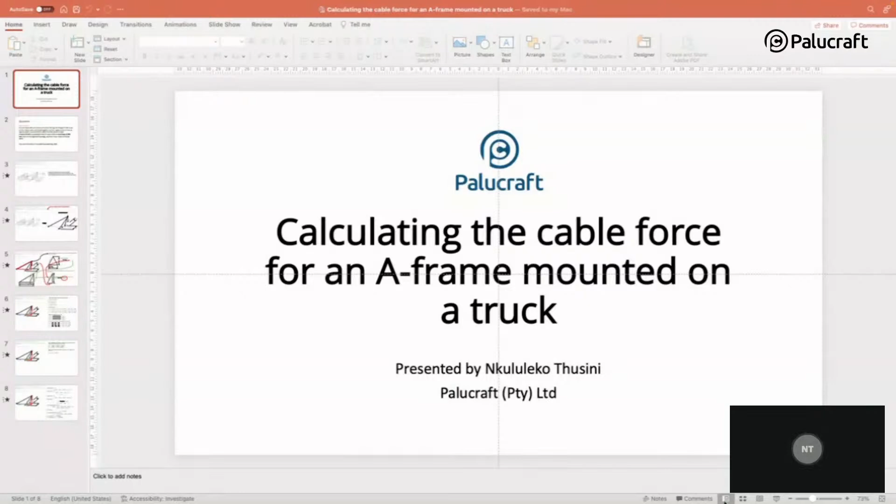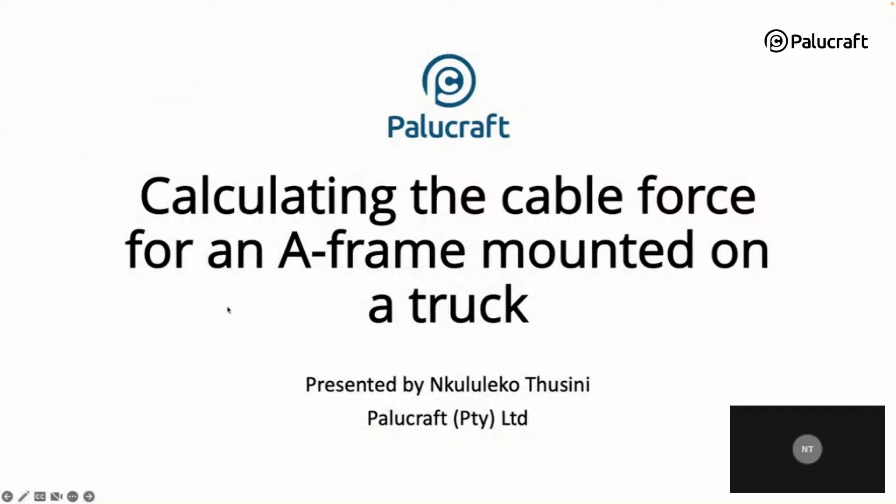So this problem, that truck A-frame question, coming from it was the first that we've seen. It was in the November 2006 exam, and it was also asked in the June 2017 and recently in the June 2022 exam. So last year we did an improved solution to this.

Some of the other solutions that we've seen just didn't make sense, and it was not very methodological, right? So I'm hoping that after today you'll be able to solve this type of question and any other variation in the future. So the question goes as follows.

So you've got a truck which is fitted with an A-frame, of which the legs are hinged to the truck at their lower ends and joined together at their upper ends to form an apex, to which one end of the cable from the winch is fixed.

So a load of 4,000 newtons is suspended from the apex with an overhang of 800 millimeters. Each of the legs is 2.5 meters long, and their lower ends are 1.5 meters apart. You're required to calculate the force in the cable and the force in each of the legs, and this is for 12 marks.

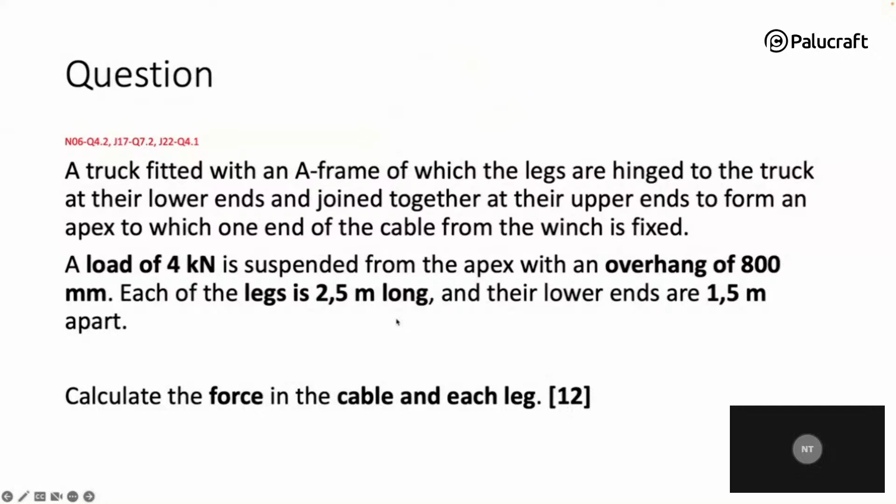So the first thing you need to note about this problem is that in the June 2022 and the June 2017 exams, they didn't include the schematic here, which was included in the November 2006 exam. What I can tell you is that it's almost impossible to solve this problem without the schematic, or at the very least being given that cable angle there of 30 degrees.

So in the June 2022 exam and the June 2017, they didn't include it, and we did inform the Department of Labour that the question itself is problematic and it doesn't allow candidates to actually answer the question.

So you're probably asking yourself, then what do I do when I come to the exam and they don't include that? So you don't give up, you make a reasonable assumption. So the reasonable assumption that you will make here is that angle is 30 degrees, or whatever reasonable assumption that you can make.

Or if let's say you've never seen this question, then you just need to assume the angle, that cable angle over there, in order for you to be able to actually answer this question.

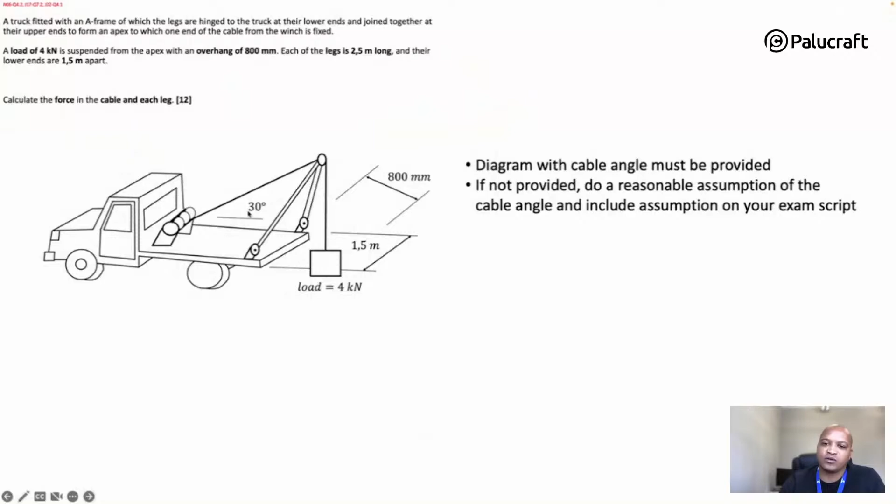Now that you've got that 30 degrees angle, it will be easier to answer this problem. Remember from our 6-step process: first we do a schematic, then put in the data, then primary formula, secondary formula, solve for missing data, and final solution. For this one, we'll move slightly differently, but we'll start with the schematic and then do the formulas. I'll show you how I did this, and you'll see at the end why it makes sense to do it this way.

For this problem, you will need to understand the 3D equilibrium of rigid bodies. That's the easiest way to solve this question. If you try to solve it like some other solutions, it gets very confusing. But if you solve it using the basics of 3D equilibrium of rigid bodies, you will see it's actually much faster and easier to understand.

The thing about 3D equilibrium of rigid bodies is that we can't use the normal methodology or the normal 6-step process that we preach, because you have to work out the different components step by step until you get to the final answer. So the first step when working with rigid bodies is to do a free body diagram.

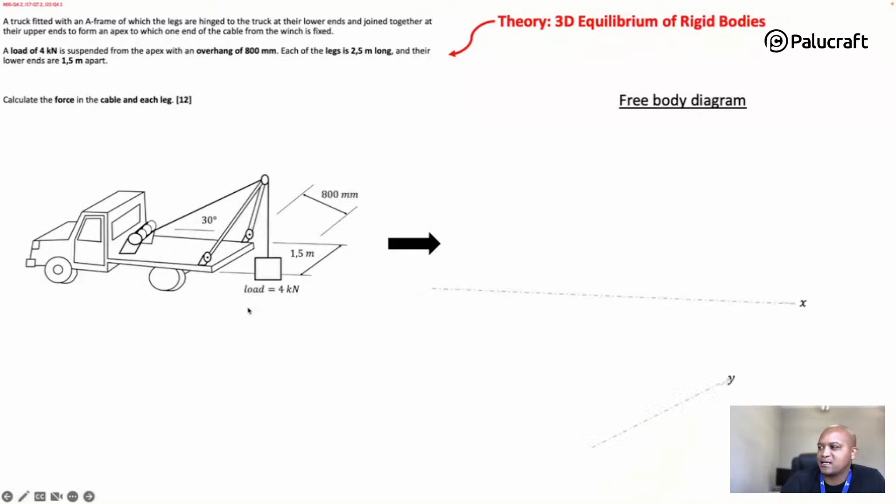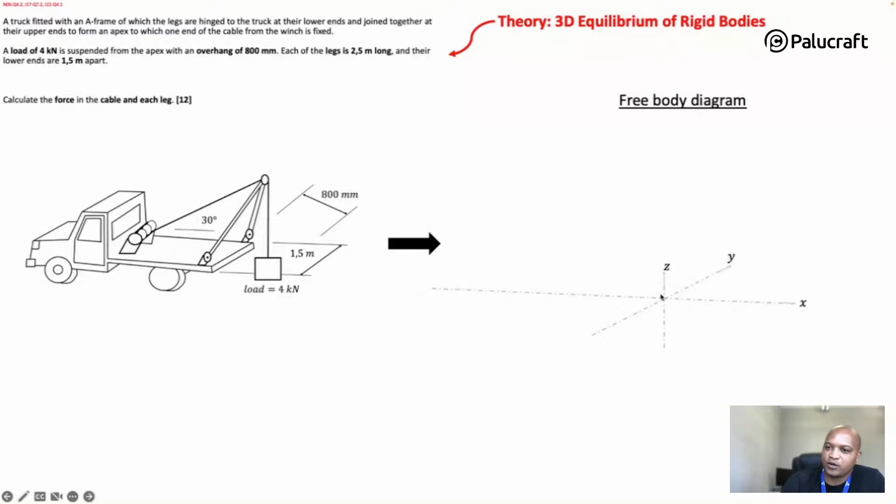So if we look at this specific truck and the A-frame, we will represent this diagram in a 3 Cartesian plane, namely the X, Y, and Z directions. There's our neutral point. Moving that direction we've got positive Y, that direction positive X, and that direction positive Z. We take everything that we know about the different points.

For example, we know that at the apex, which is point A, represented by that point there, we see the load going down at 4 kilonewtons. Then we've got point B, which is the first connection from the first leg, so that's leg AB. Then you've got AC, and there's that connection there, and where it connects to the winch we've got that as point D, with that angle as 30 degrees connecting from point D to point A.

So that's the one neutral. This is overhung - point A is overhung, shown over there. So basically that means point A is not sitting on that Z-axis. You go up the Z-axis, and then it's overhung by 800 millimeters, or 0.8 meters. Then from there, you've got the distance between B and C, which is 1.5 meters. So this is our free body diagram.

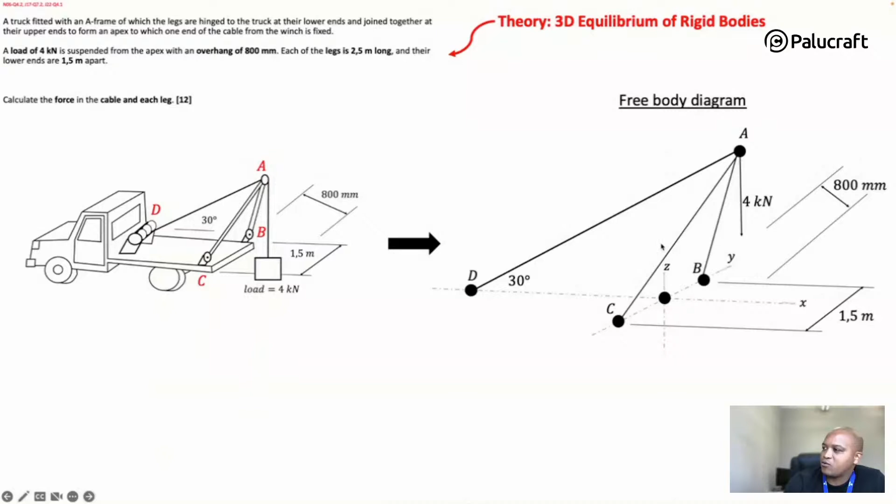From this, we know that we've got a tension force on AD, a compression force on AB, and another compression force on AC. With that free body diagram, we can then start looking at the different positions.

I'm not really going to go into the 3D equilibrium theory, so I do expect that after this you will go and review that material. The 3D equilibrium of rigid bodies comes from a lot of mechanics textbooks, or even if you Google it, you will find a lot of content on 3D equilibrium of rigid bodies.

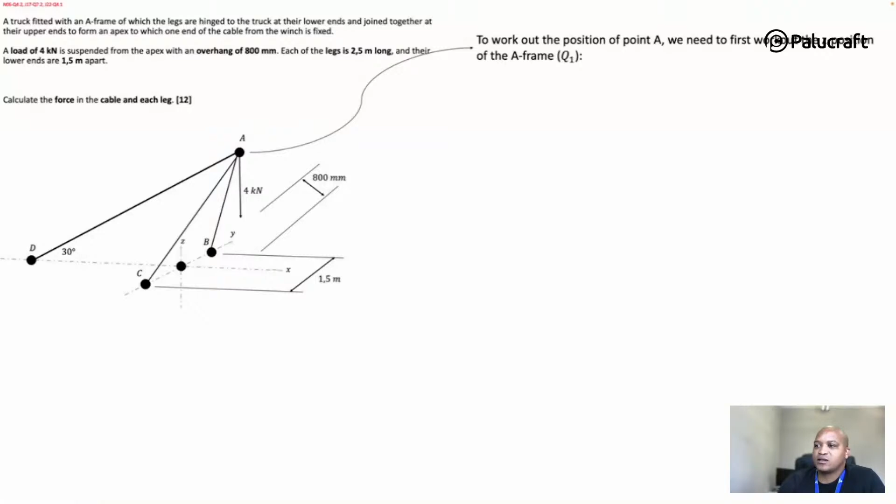The whole approach when dealing with rigid bodies is you want to determine the position vectors for these four points, which is position A, B, C, and D. Once you've determined the position vectors, you can then work out the different vectors that are acting in the cable and in the leg as well, and then taking account of the weight as well.

Now, the first thing that I want to determine is that position A over there. As I've explained in a previous slide, it's sort of sitting on the Z-axis, and then there's that overhang. So you want to get to that position. We're just going to break it down step by step. Let's look at that triangle ABC. If we look at that triangle ABC from a 2D point of view, this is what we have, okay?

So we are given that that leg is 2.5 meters long. So AC is 2.5, AB is 2.5, and the distance between B and C is 1.5. Now, if I look at the center of that, I'll just take that 1.5 divided by 2, and that means that distance is 0.75 meters.

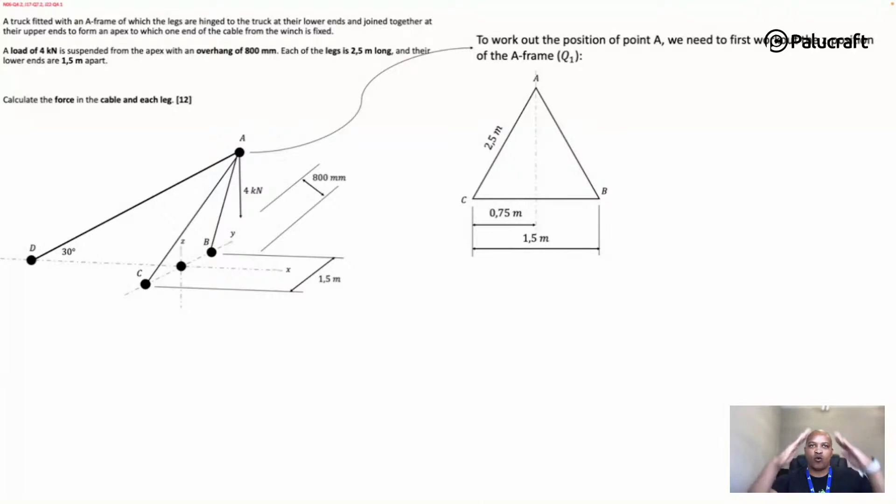Then from there, remember the reason I'm doing all of this is I'm trying to find the Z position of A. So if you can imagine, I've got this frame sitting like this, and it's tilting in, right, so that is the overhang part. You would agree that once it's sloping down, the actual Z position is slightly less than it would have been if just straight, as represented in this 2D.

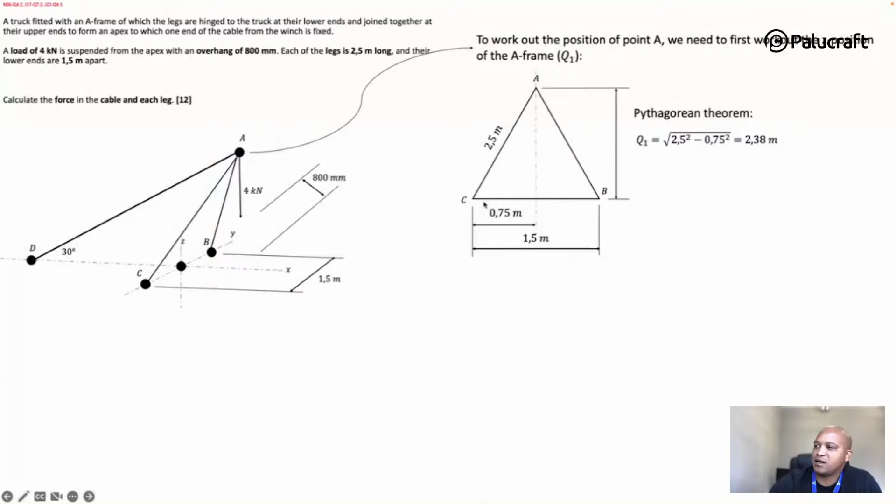So we use Pythagoras theorem to work out that first part, which is that distance there, which I'm calling Q1. From Pythagoras, we take the hypotenuse squared minus that section squared, and then all square root, and that works out there. But this is not the Z position of point A.

So what we need to do is account for that overhang over there. If you look at it from the side, just imagine cutting it through and looking from the side, so then you've got position A, and that 2.38 is basically that hypotenuse over there.

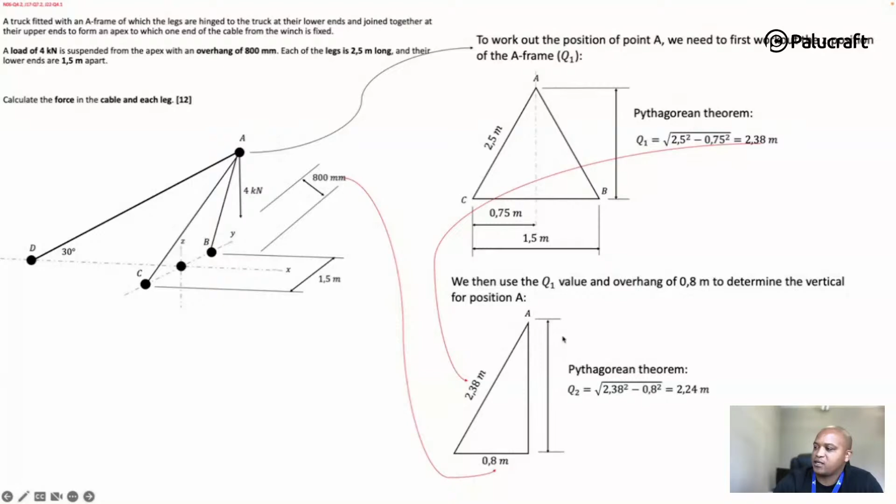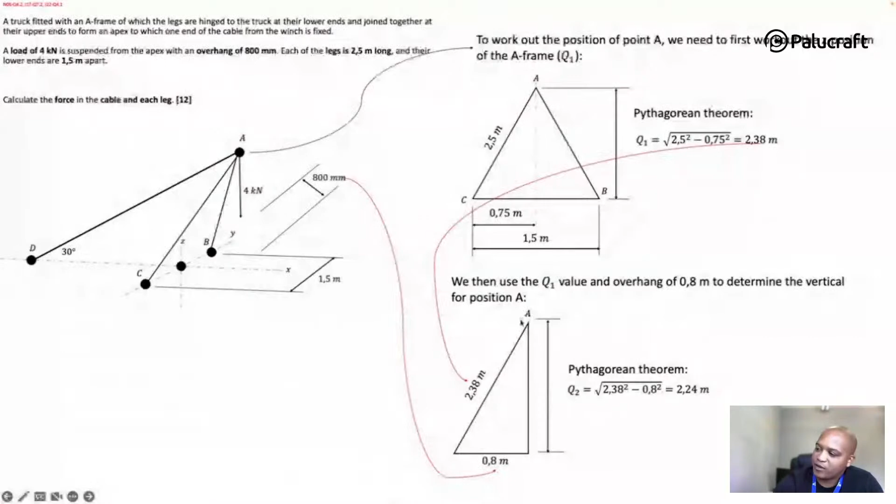Then the overhang is 0.8 meters, or 800 millimeters - I'm just representing everything as meters. And then from Pythagoras, Q2, or the position of A in terms of the Z direction, is 2.24 meters. Again, this is basic Pythagoras theorem.

Now, from here, you can see that the big thing I wanted to work out was that position of point A from a Z direction point of view, which I've sorted out. The next one I need to sort out is that position, sorry, that point, that position D over there.

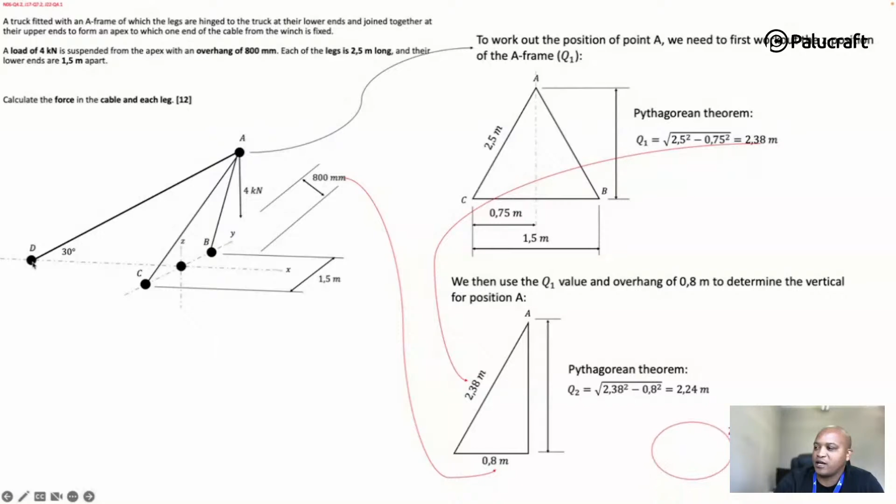So now to sort out that one, I'm just saying that's the Z position. To sort position D, again just imagine that triangle over there, so there is that big triangle. From the information we have, we know that point is overhung.

So if it's overhung, then you've got that overhung point of it over there, which we've worked out as 2.38 meters. And we've worked out also that straight section there is 2.24 meters, and that this is given as 0.8 meters.

Now this part here, we just look at that big triangle at an angle of 30 degrees, then we just use the triangle laws, so that's opposite over adjacent, right? So that's tan of 30 degrees.

So if you look at it, it will be 2.24 over the x that we're trying to work out, and that will be 30 degrees. So if we take the x to the other side, therefore it's 2.24 divided by the tan of 30 degrees, and that works out to 3.88 meters.

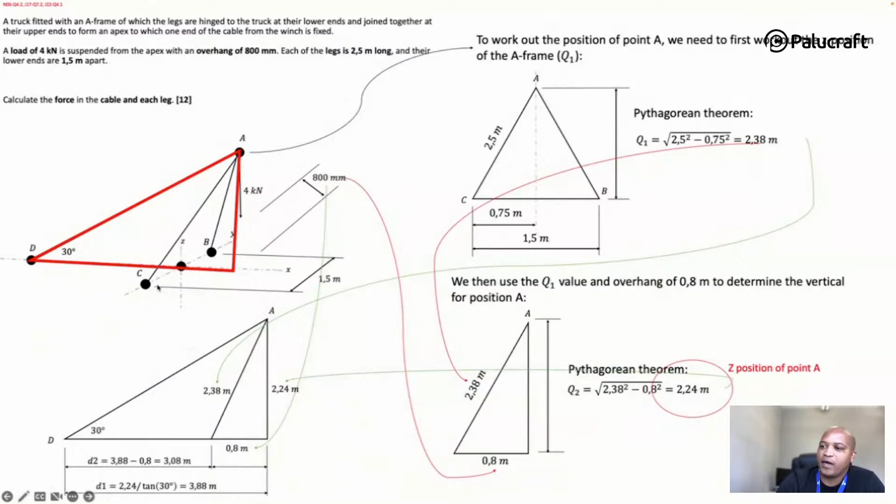Now, we know that's 0.8 meters, therefore we can find that position there as 3.08. So it's 3.88 minus 0.8, and it gives us that position D. So we now have the positions for the different points in our free body diagram.

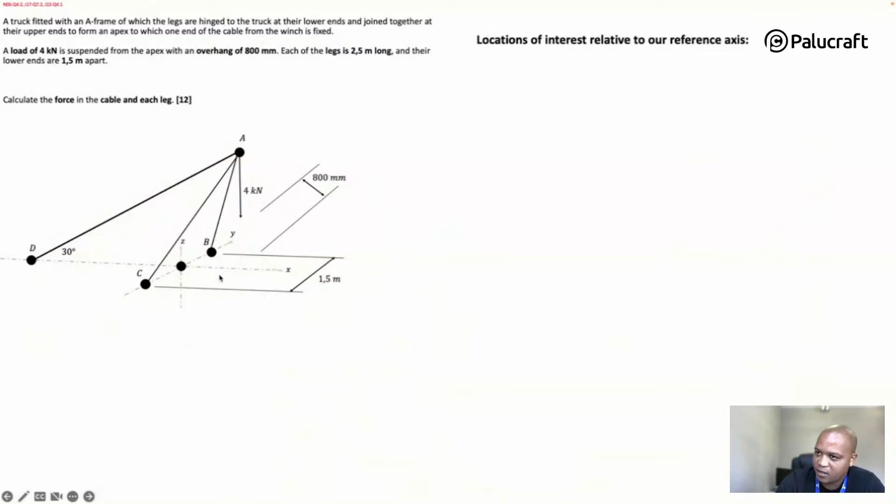So let's do our locations of interest relative to our reference axis, which is that axis over there. Now, if we look at point A, to get to point A, I'm traveling 0.8 meters in the X, and then 2.24 meters in the Z direction, and that's how I get to that point.

You would agree that I'm not moving in any direction in the Y direction, and therefore, if I represent point A in terms of the X, Y, and Z coordinates, it's 0.8 in the X, 0 in the Y, and 2.24 in the Z. This IJK representation, again, it's basic applied mathematics and basic rigid body theory.

So if you don't know this representation, then it will be very important to review that theory.

Now, if we look at point B, from the neutral point I'm just moving in the positive Y direction 0.75 meters. Remember, BC is 1.5 meters, and it's reasonable to assume this is acting at a midpoint, because that's how usually these A-frames are set up. On C, I'm moving in the negative Y, so that's negative 0.75 J. And I'm not moving in the X or the Z.

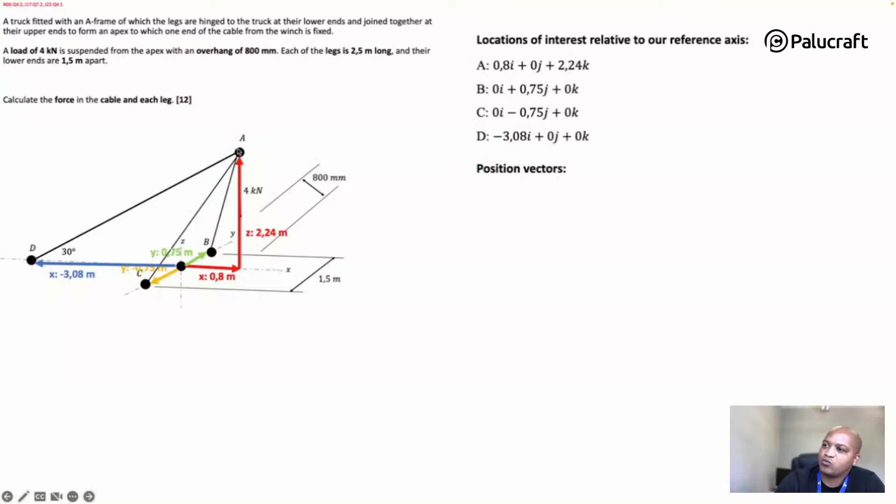Now we can start working out our position vectors. The position vectors will be that vector. If we look at point A, there's the vector in AB, the vector in AC, and the vector in AD.

The position vector AB will be that. I'm going to look at the X, the Y, and the Z. So it's BX minus the AX position, and then I do it for the Y, do it for the Z, and then that's that. At the end, I've got the position vector RAB.

Then I can also do the same for position vector RAC, and then do the same thing for AD. So at the end, these are my position vectors for RAB, RAC, and RAD.

So from there, I want to represent the position vectors as unit vectors. The reason for that is I want to work with the same sort of units, so that when I multiply by my forces, everything is aligned properly.

So I go on and calculate the magnitude of these three vectors. Again, calculating the magnitude, this is the basics of applied mathematics. So there's the magnitude for RAB, RAC, and RAD.

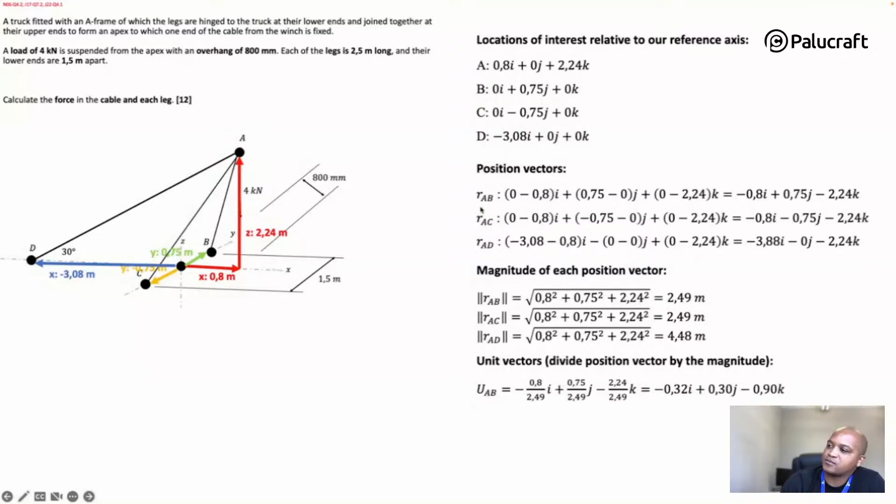Then from there, I take the position vector and divide it by its respective magnitude to get the unit vectors. So I'm just doing that division. This is just mathematics. Pull out your calculator and you will find these are your unit vectors.

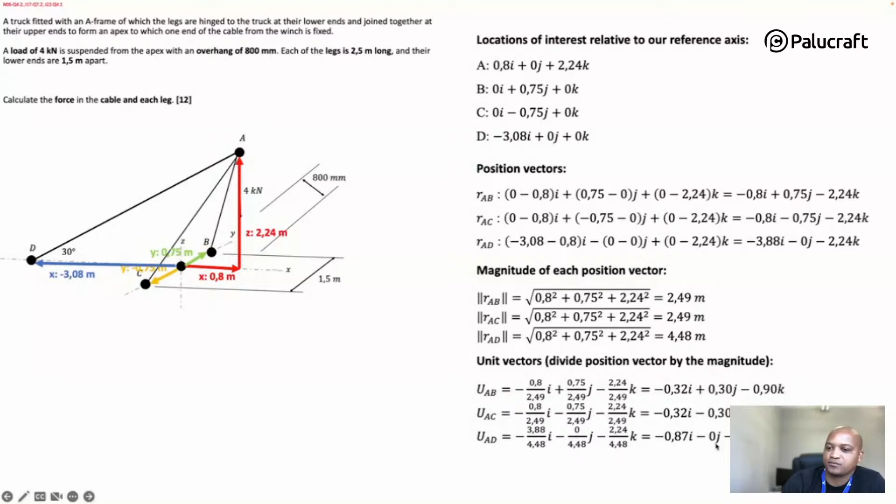From here on, remember that the whole point of this question is to try and calculate the tension in that rope, given the force of 4,000 newtons, and you need to calculate the force on those legs. So what we can do now is express each force in Cartesian form by multiplying the magnitude of the force by the unit vector.

We know there will be a force. Let's start with AB — there's going to be a compression force FAB there. I just multiply the unit vector by that FAB, and for AC I do the same thing, multiplying by force AC. For AD, same story — I multiply it by the tension force there, FAD. Now we know there's that one force acting, which is the load.

That load is just acting in the Z direction, in the negative Z direction, and that's where we get that 4,000 newtons. Don't get confused by this K — remember, we've been representing the Z component as K. So this is not 4,000 kilonewtons, it's just the 4,000 K, or the Z position. Don't get confused by that. So this force here is only acting in the Z direction.

So then from there, we can take the sum of the forces in the X, the sum of the forces in the Y, and the sum in the Z direction. Again, from basic theory — from rigid body theory, we know that the sum in the X direction must be 0, the sum of the forces in the Y must be 0, and the sum of the forces in the Z must be 0.

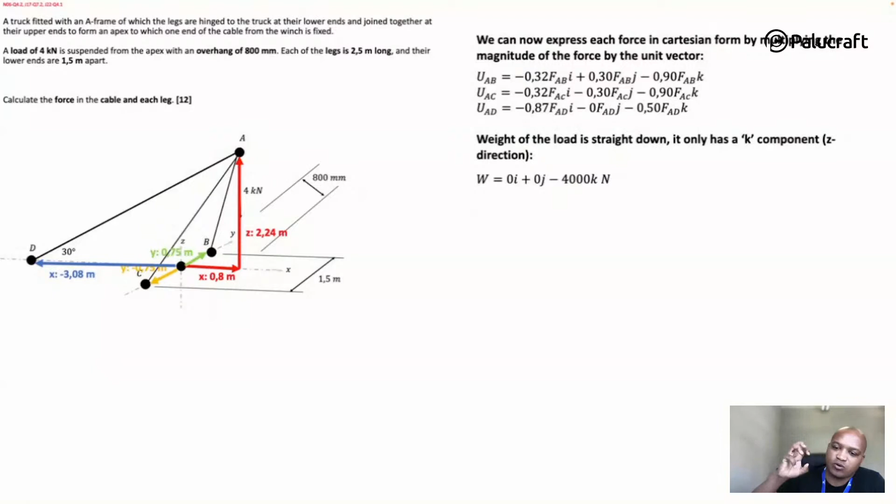That is the basic rigid body theory. So all I'm doing here is summing all the forces in the X and then equating to 0, and the forces in the Y must also be equal to 0. So you'll see that that will be my first equation. And from here, this works out to saying force AB equals force AC.

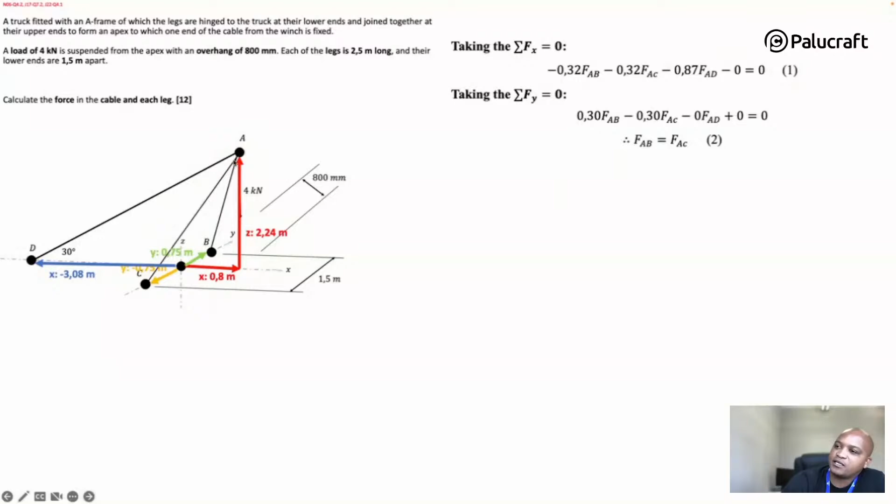And by just looking at this arrangement, you would have gotten to that conclusion to say, well, AB will be equal to AC if this thing is sitting at dead center and the two legs are taking the load equally, divided by 2. So this mathematics that we've done has proven the basics of just looking at that schematic.

So we know we're in the right direction so far. Then we look at the sum of the forces in the Z direction, which equals 0. From this, I'm going to solve for FAD, and call that equation 3. The reason is I want to substitute everything back into equation 1, where the only unknown variable will be FAB, which is the compression force on that leg. Doing the mathematics, I find that FAB is negative 2,792.94 newtons.

Then I can calculate that FAB is equal to FAC, so that leg is also negative 2,792.94 newtons. Then I can solve for the tension, which works out to 2,054.58 newtons.

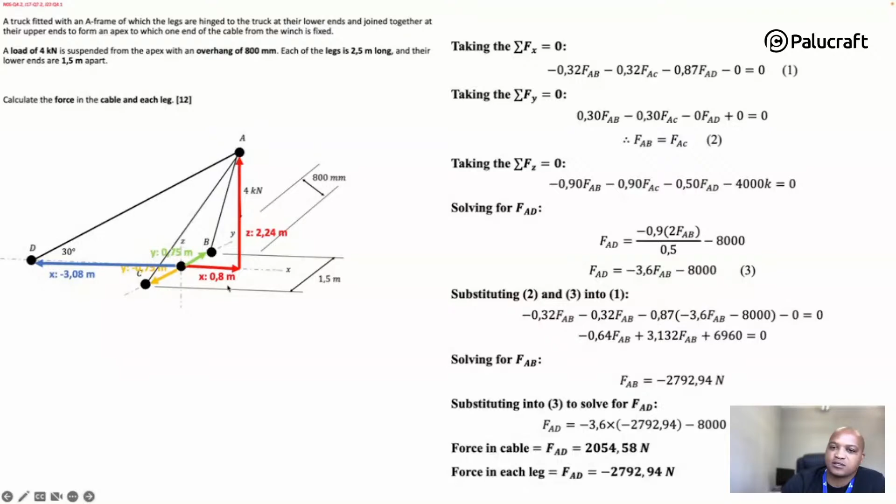I think, as I said, some of the solutions we've seen try to reason the different forces, but doing it this way is the fastest way to solve this problem. In the future, when they ask similar questions about rigid bodies, you know you just apply the basic theory and can answer any static problem in upcoming exams. This was one of the surprise questions in the June 2022 exam, and it was an easy 12 marks if you just followed this theory.

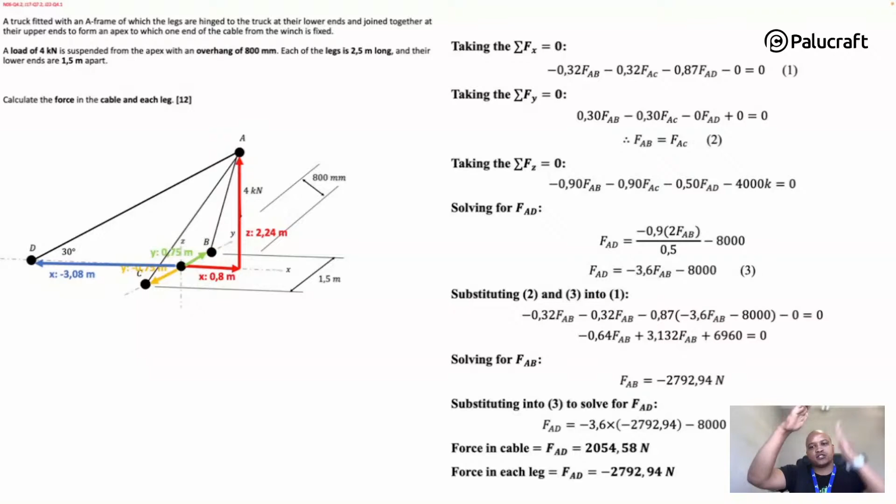In past exams, they've asked different variations of rigid body or static questions. For example, the cantilever one where they don't say it's an A-frame, but give it to you as a string connected to a wall with a cantilever and a load going down. For that one too, to calculate the tension and reaction forces, if you use this basic approach I've just shown you, you can answer any other question.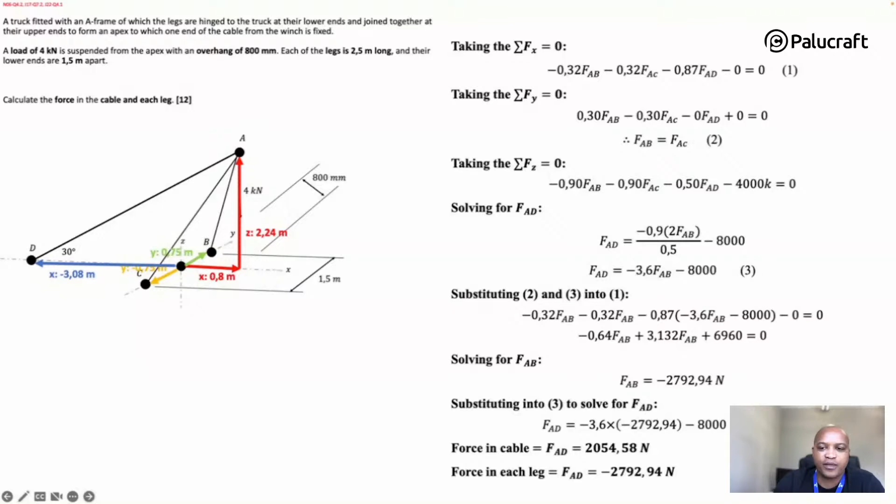Is this linear regression? No, it's not linear regression. It's a question from the GCC Factories Plant Engineering exam, which basically required the calculation of forces from an A-frame mounted on a truck. Yeah, I think that's the long and short of that.